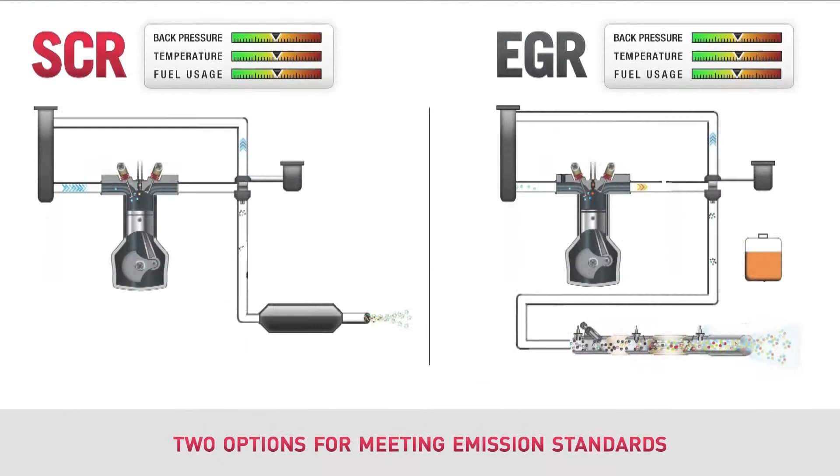All internal combustion engines create emissions. Emissions are the result of burning fossil fuels, and there's no way around it. But all engine manufacturers are making huge strides in minimizing the amount of harmful pollutants released into the environment. When it comes to reducing these emissions, there are two very different approaches.

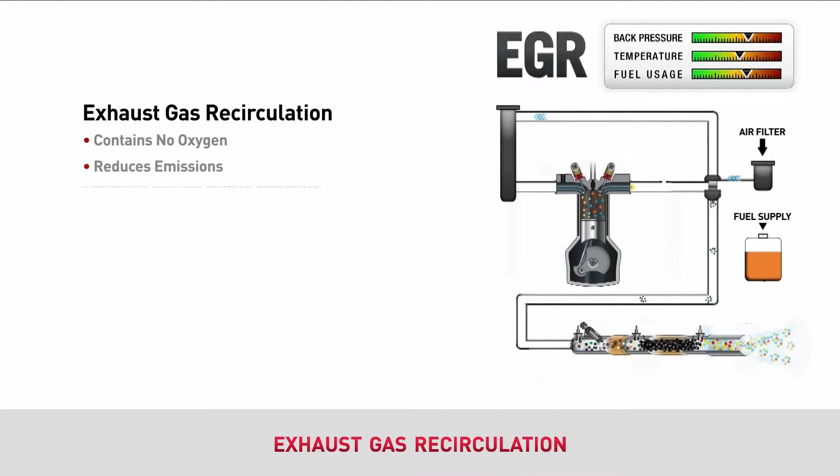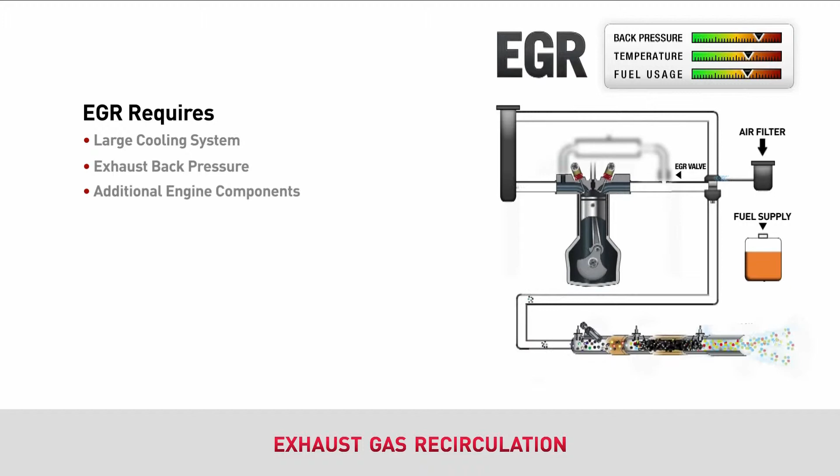The first is exhaust gas recirculation, or EGR for short. Since exhaust gas contains no oxygen, it does not burn. This reduces emissions, but ultimately reduces overall engine efficiency. EGR requires a large cooling system and emission components added to the engine. The additional engine components include an EGR valve, EGR cooler, and associated plumbing.

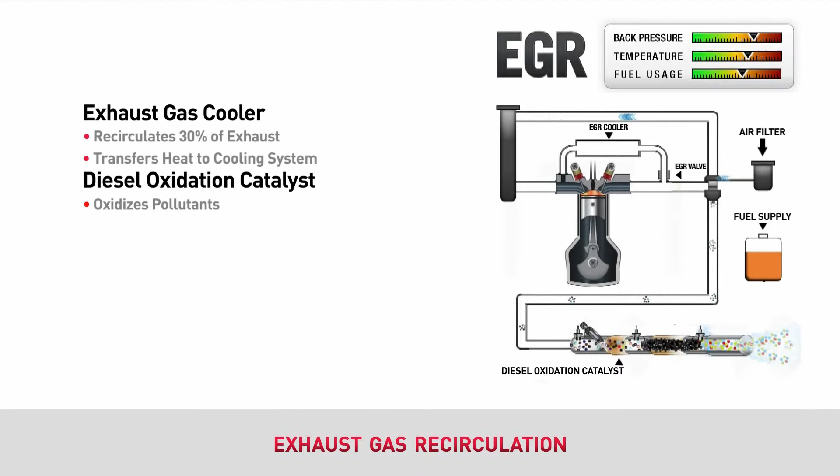New engines will need to recirculate about 30% of the exhaust gas back into the engine. Since the exhaust is hot coming out of the engine, it must be cooled in order to be effective at reducing emissions. The EGR cooler transfers the heat from the exhaust into the cooling system. EGR systems also add a diesel oxidation catalyst to interact with the diesel fuel to oxidize the pollutants before they exit the system. EGR reduces NOx, but does not eliminate the particulate matter from the exhaust.

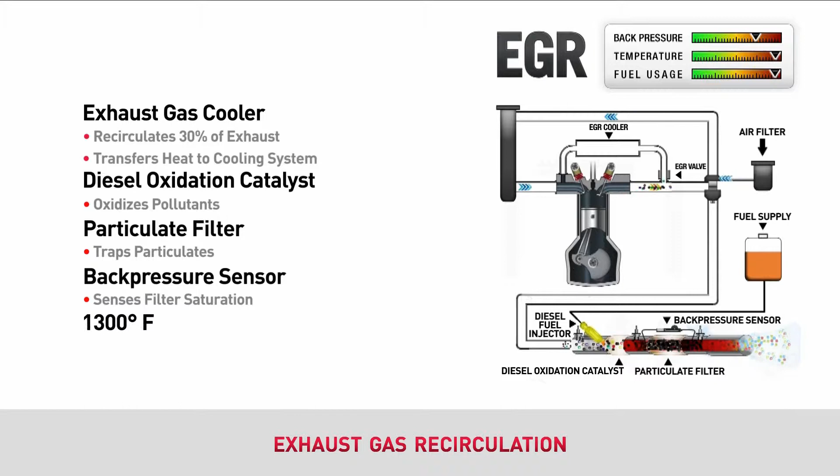A particulate filter must be used to trap these pollutants. Like all filters, the particulate filter will become plugged and create excessive back pressure. To reduce this back pressure, diesel fuel is injected and monitored in the exhaust system to produce an extreme amount of heat, up to 1300 degrees Fahrenheit, to burn the trapped particulate material. This is called regeneration.

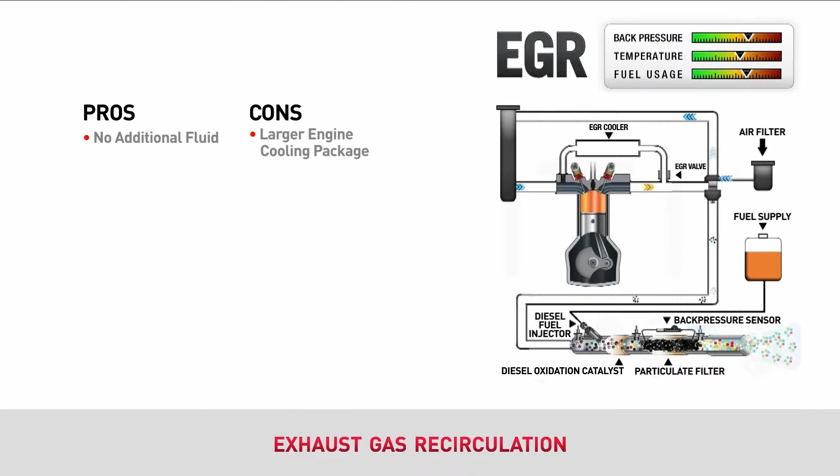The only benefit to EGR is that it doesn't require a secondary fluid known as diesel exhaust fluid, or DEF. But there are several drawbacks to EGR and the exhaust filter. As previously mentioned, there is a huge amount of heat transferred into the cooling system from the EGR cooler and from the regeneration process. During regeneration, the temperature in the exhaust system can get incredibly hot, up to 1300 degrees Fahrenheit.

An EGR engine will have shorter oil change intervals as a result of drawing dirty exhaust gas back into the engine. Additionally, exhaust gas contains carbon. Carbon is abrasive and hard on the internal components of the engine.

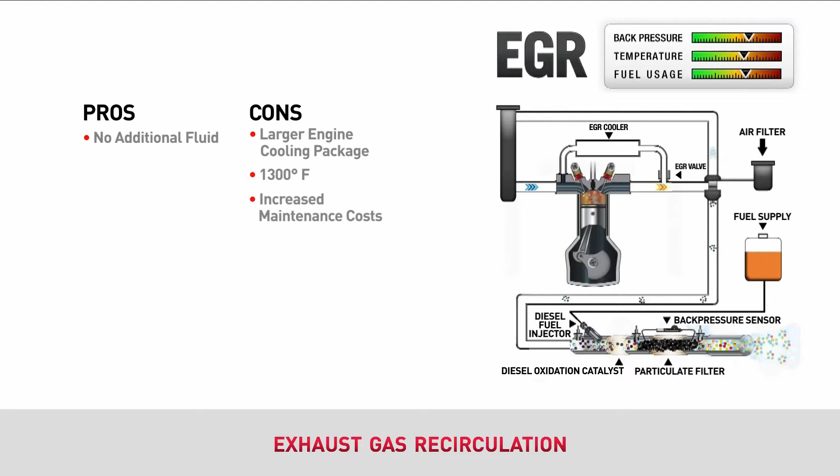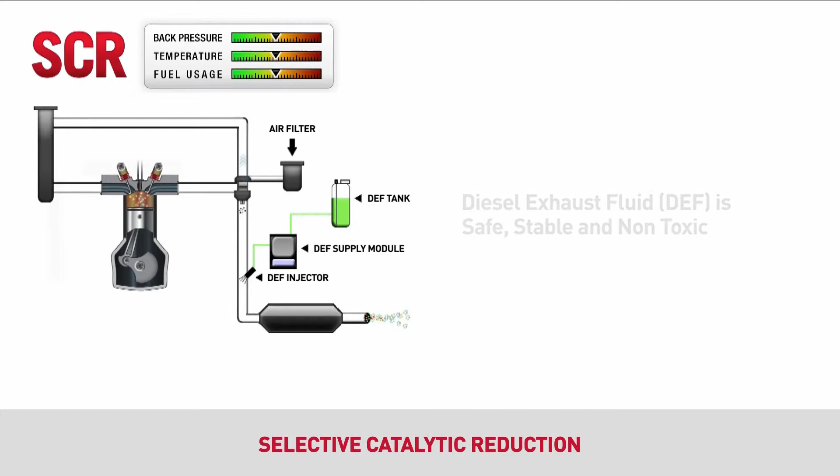The second approach and alternative to EGR is selective catalytic reduction, or SCR. SCR uses diesel exhaust fluid, or DEF, and is composed of a DEF injector, a DEF supply module, and a DEF supply tank. DEF is a safe, stable, non-toxic liquid that converts NOx into a harmless mix of nitrogen and water vapor. This chemical reaction takes place in the Case IH-designed SCR chamber.

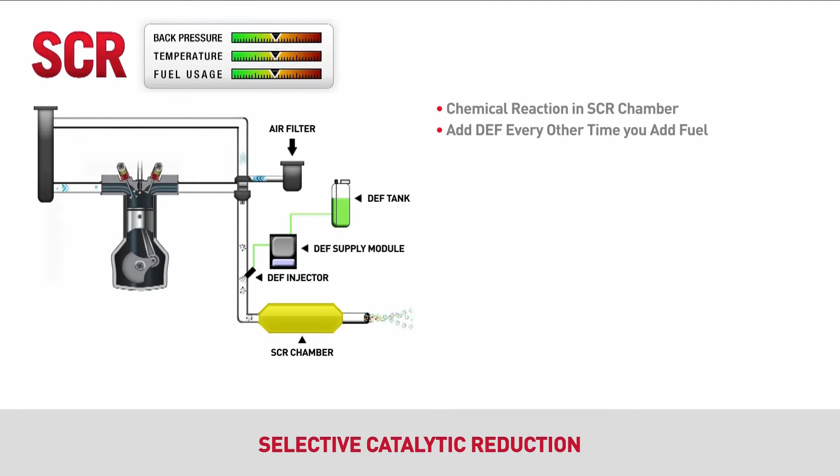All you have to do is add DEF every other time you add fuel. The SCR chamber never requires service since it is not a filter. SCR is a much simpler process compared to EGR. It enables Case IH engineers to tune the engine for maximum performance without any sacrifices. This is because the pollutants are reduced in the exhaust system after the combustion process.

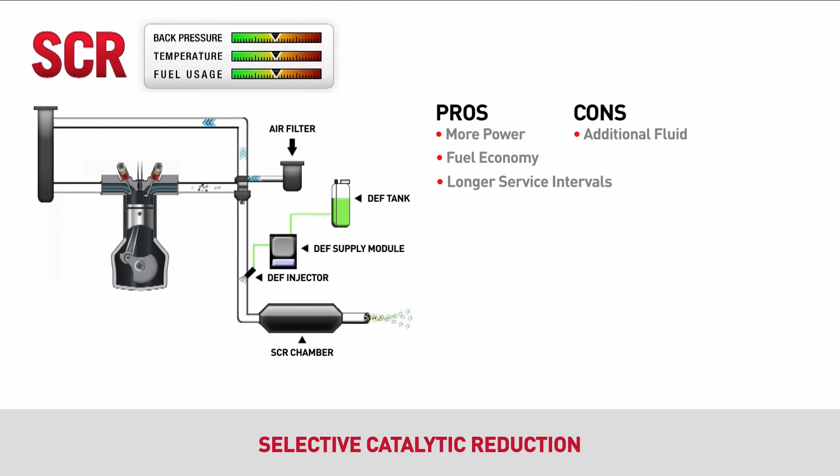SCR offers better fuel efficiency. In fact, 1 gallon of DEF will save you over 2 gallons of diesel. Eliminating the need to recirculate exhaust gases back into the engine allows SCR to have longer service intervals, because the engine operates cleaner and offers greater reliability when compared to EGR.

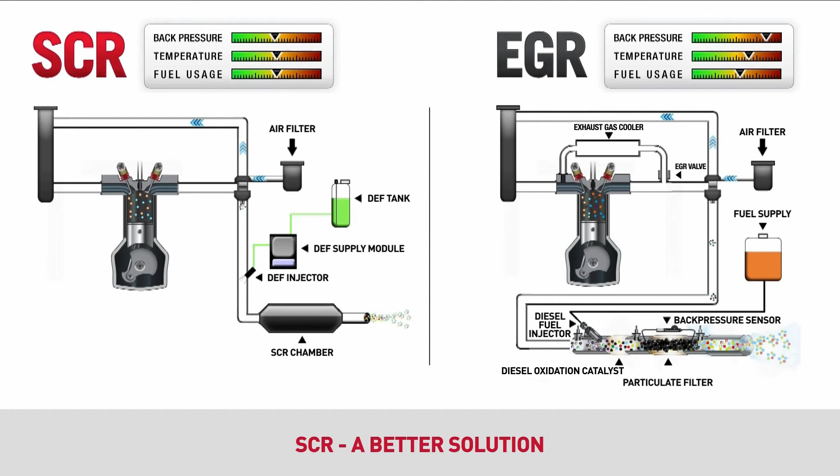Case IH chose SCR because it is the best solution for engines over 100 horsepower. Worldwide, 9 out of 10 diesel engine manufacturers agree. SCR operates at cooler temperatures, increases the engine's reliability, and consumes less fuel, thus improving your bottom line.